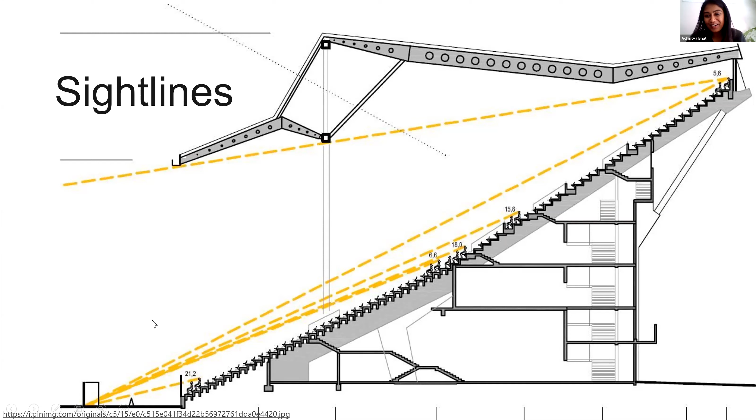And with that, let's jump into the stadium anatomy. So at bare bone level, just the skeleton of the stadium, you have an event level, the lower bowl, a concourse or a walkway, and an upper bowl. And when we are designing a stadium, the most important thing is always the sight lines. So you need to make sure that irrespective of where our spectators are sitting, everyone has unobstructed view of the event level, because most of the time they've paid an exorbitant fee for the tickets.

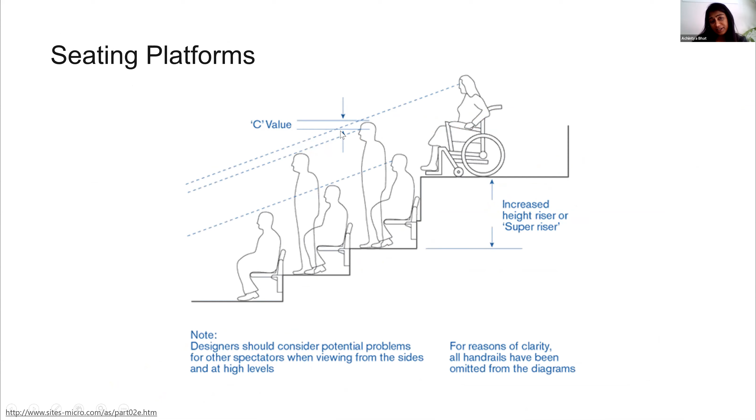And in order to optimize that, the parameter which will help us is a C value, which is basically the gap between the sightline of the spectator with the spectator sitting in front of them. So that's perpendicular distance. And the formula that is used in order to calculate that C value, it's simple, basic math, trigonometry. And this is the formula here, and some of the parameters that are required are the seating, the row depths, and also the step heights here, which are called T and N, and also the vertical and horizontal distance from the focus point, which is at the event level, to the eye of the spectator in each row. So these are the parameters that are required in order to calculate the C value, which will let us know if the spectators have good sight lines.

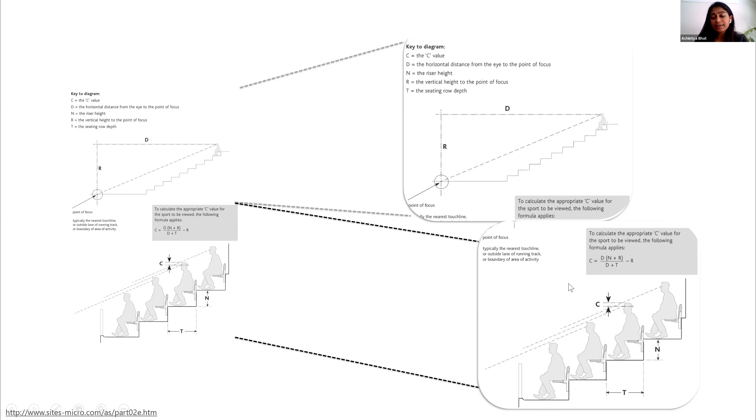So with that brief intro, let's move into the Dynamo scripts, the spaghetti monster. And the way I will go through this is first, I'll dive into the Dynamo script. Then I will show you how I moved it to Refinery if you're using Revit 2020, or if you're in Revit 2021, the generative design add-in.

And I'll also briefly show how you can export the seating plan to Power BI as an interactive map if you want to do additional analysis, maybe cost analysis or something like that. And then finally, how you can push it to Revit.

Some of the parameters which I've assumed here to be constants are my site size, the field size requirements, and also the number of levels I would have in the seating bowl, the walkway depth, the width, and also some of the exit requirements.

So first things first is the number of rows you would have in the seating bowl. For that, our site size is fixed, the radius or the dimension of the field is fixed, and F is the focus, which is the distance from your event focus point. All of those are parameters which are fixed. The variable here is the row depth, which we'll be using for the optimization study.

That's not fixed. And based on that, it will calculate the different number of rows that you can have in the stadium. And then once we have the row depth, we can offset each of these boundary curves and get the row curve location in the horizontal, flat XY plane.

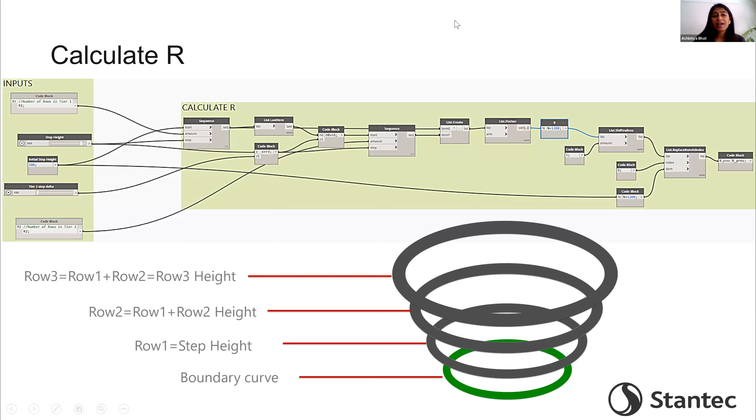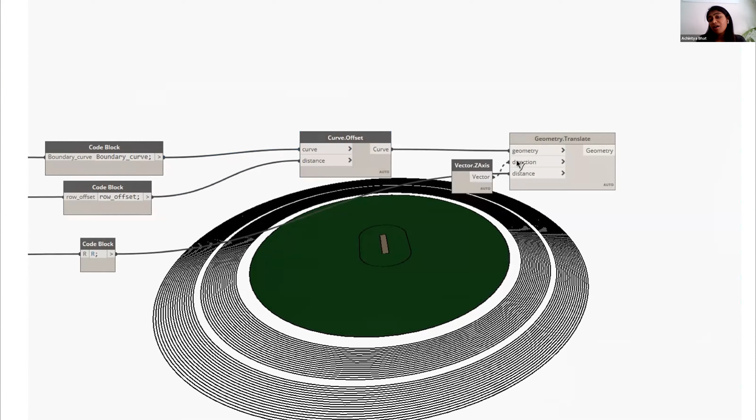So we need to add an additional value, because when a person is sitting, there's a height from the foot to the eye level, which is about 1.2 meters for an average human being. That will add up and give us the R value, the vertical distance. So once we have these two, we know where our row edges would sit in the seating bowl, and where the eye of each spectator in each row would end up, using these curves which show where physically it would be.

And now that we have all of these parameters, we can calculate the C value. But I would like to mention again that the row depths and the riser heights, the N values, are variables. We haven't fixed them. That is what we're trying to optimize here to make sure we get good C values. And I've broken down the C values into 5 ranges. Anything below 60 is not good at all.

Above 150 is very good, but then you would not be fitting as many people as you can. So I think I was looking more for around 120, which is very good. People can still see if someone's standing. And also gave some color coding, just visually when I look at it—if something is red, I know it's below 60.

But all of this just gives us the row edge curves, right? I don't have the actual geometry. So what I did is take a point on each of these row curves and drop them down by the riser heights, then join all of these points to give me the profile of the seating bowl. So now I have the boundary curve, and I also have the profile.

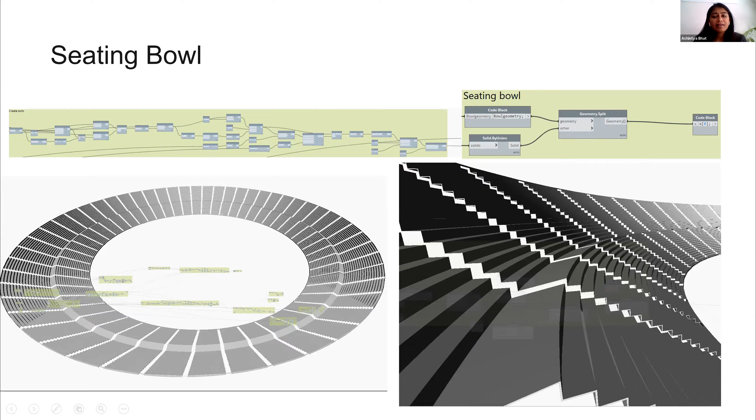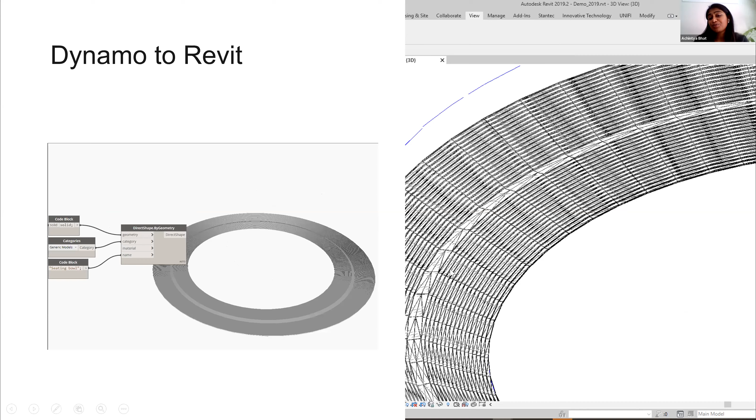Once I have the seating bowl here, what I did was export it to Revit using the direct shape by geometry node in Dynamo. I actually like the Springs node one because, as you can see in the previous one, when you use the out-of-the-box Revit node, it creates triangulation, which I'm not a great fan of. So the Springs node gives a more clear geometry in Revit.

Or you can also break it down. What I did here is export the seating bowl, take all the top vertical and horizontal faces, and export it to get the perimeter curves, then use the floor by outline type and level node in Dynamo to get it as a floor component into Revit. So there are multiple ways you can bring it.

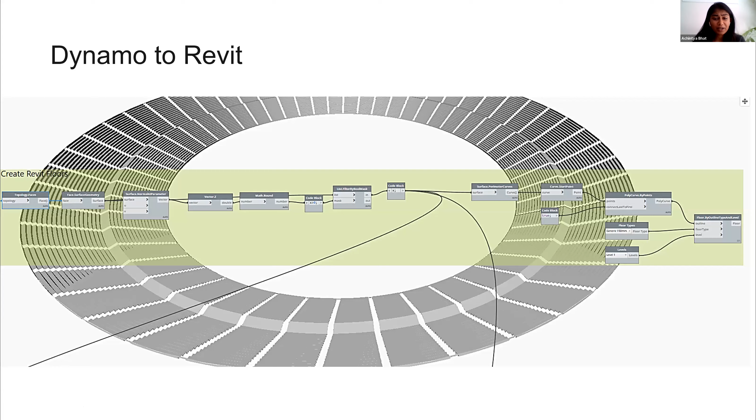So this is an overall picture of how the Dynamo script looks. What I'd like to bring attention to is the data gate node, which I used with Revit 2021—I really like it. What it helps with is: if you set it to close here, it knows not to run the rest of the script after this data gate node, like when Refinery is running.

It will just generate the rest of the script here, which is all I need in order to do my optimization study. I don't have to actually generate my seating bowl geometry and create exit openings and so on—all I need is those seating row curves, which will give me all the values I need to generate my values. So that, I think, is a very good functionality.

Once you have the script, if you're in Revit 2020, you can click on the Refinery option on the top. In this demo, I'm running just a cross product, so it's a brute force algorithm generating all options possible based on the variables I've set. It's not trying to optimize anything, there's no fitness condition given, and it's generating all the possible options.

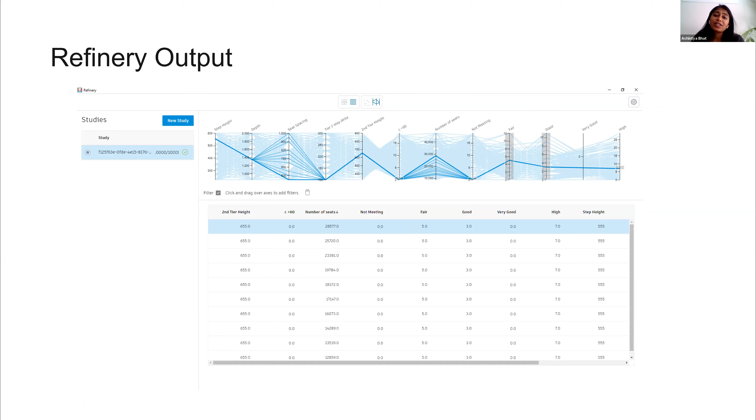After that, it will look something like this, and then it's up to me as a designer or architect. You can select what are your best options. For example, I'm trying to make sure I don't want any seats which have a C value of less than 60, because that's just poor sights for the spectator sitting there. Then you can select the best option, click on it, and use that as your input for your Dynamo script and push it to Revit.

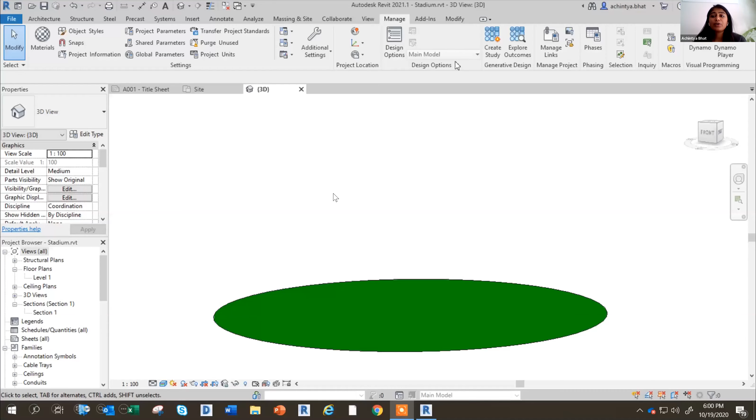With Revit 2021, you can use the export for generative design button on the generative design tab. What that will do is save a version of the script in your C drive. When you go into Revit, you can go to the Create Study tab, select the particular script you want to run, choose your variables, and set your goals.

Here, I'm trying to minimize the seats which have C values less than 60, and maximize the ones which have more than 120. Just for this demo, I'm using a very small population size.

It takes its time, it will start running. I'm going to forward it a little here. As you can see, with every generation that it runs, it's trying to optimize it, choosing different parameters. For example, right now the third generation actually has lesser optimization because it had some which had a C value in the range of 90 to 120, whereas previously it was giving most of them in the range of 120 to 150.

And it will run all of these options for me. I'm just going to forward it. So once it's done, the option is giving me all of my seats in about the 120 to 150 range, which is very good.

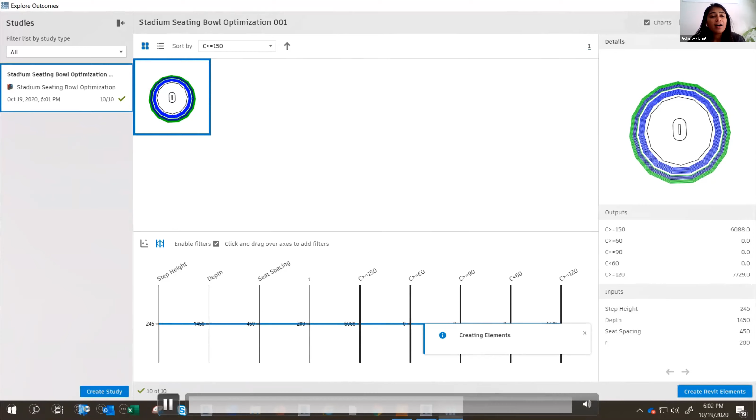Then you can click on the Create Revit Elements button, and it's going to run the part of the script which I had closed using the data gate node. It takes some time to create all of the geometry and then push it to Revit.

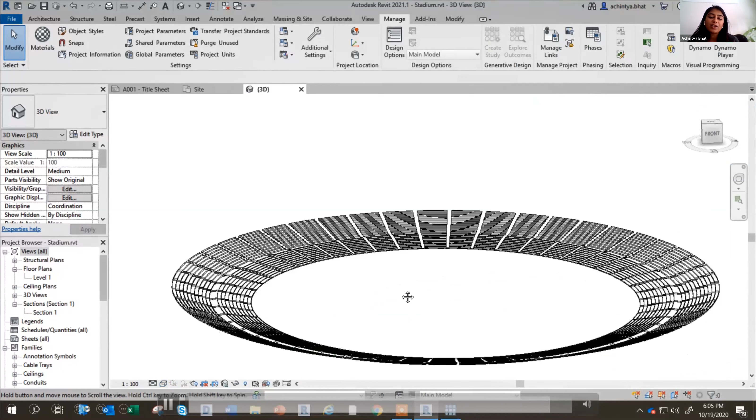So that's how it looks. And if you're not happy, you can run your optimization script again, given more number of generations, increase the population size, or change your parameters.

Also, if you want to do more analysis, like put some costings or do a reporting, you can push the seat plan as an SVG file using the SVG export node. Just explode your geometry, take the top surfaces, get the corner points, and export it to this node. What it will generate is actually a vector file, but when you open it up, this is how it looks - it's a text file. Within Power BI, the BI tool from Microsoft which is free, there is a custom visualization called Synoptic Panel.

You can use that to generate your own custom maps. In addition to the points and vertices, it also has an ID, which is not created by the SVG export node, so you need to do that by yourself - import the SVG file created, add the IDs for each of these polygons, and export it again. That way it's going to look like how the Synoptic Panel visual in Power BI requires it to be.

I wanted to try and define what a digital twin was, and what I realized is that the Digital Twin Consortium themselves don't have a singular definition, because the value of the digital twin changes over the life of the object. So what I'm going to focus on in terms of what the digital twin may or may not be is around the very beginning of the project, in the requirements and opportunity part, and the operations.

I know a lot of the discussion that has been had is around design, construction, and commissioning. I'm purposely going to avoid that, not because it's not important, it's very important, but that's not what our tool does. So when you look at the different forces in healthcare, there's the technology side, in terms of how technology...

in terms of what treats healthcare is changing. Those of you who might have an Apple Watch or a Fitbit know that you're a walking electronic health record. That, on top of what we know about diseases, is changing. A year ago today, I don't think anyone on the call knew what coronavirus was. This whole nature of medicine is really turning things on its head.

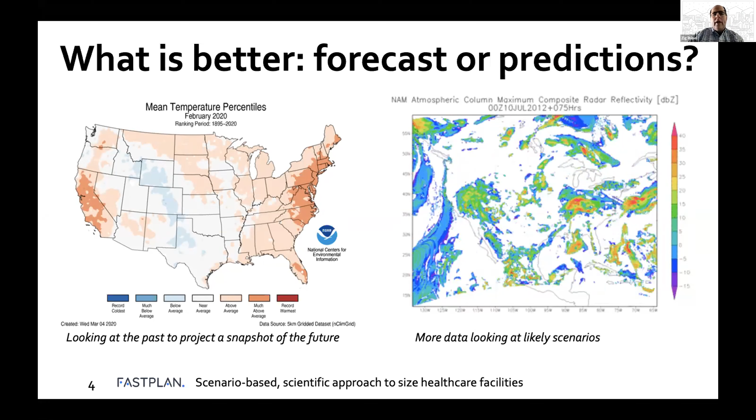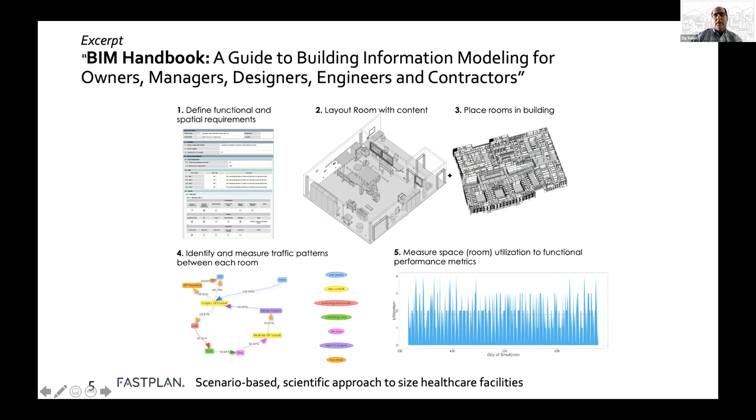This, of course, is the objects and the design of a particular project that we worked on. But the level zero data is all of this - it's the room data sheet, how the rooms interact, and all the utilization of the rooms. Especially in healthcare, maybe not in all buildings, you could come up with an abstracted solution for your design before you actually start the design.

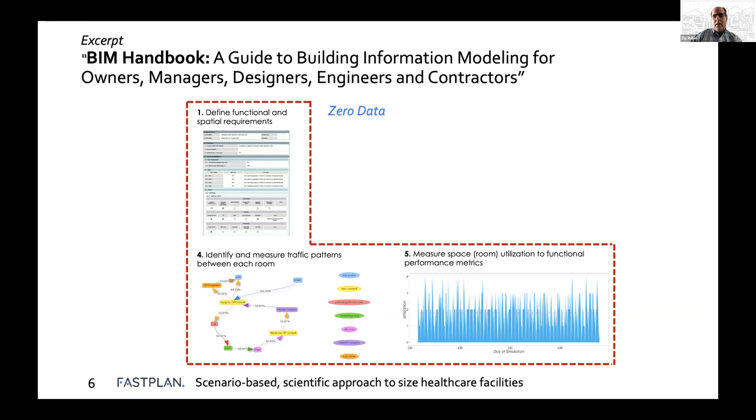What we mean by that - this is just a sample of an exam room. You have the room data sheet and all of the attributes, and those attributes are then linked to the Revit file. We were able to have a bilateral link within Revit and Dynamo to the Excel room data sheet.

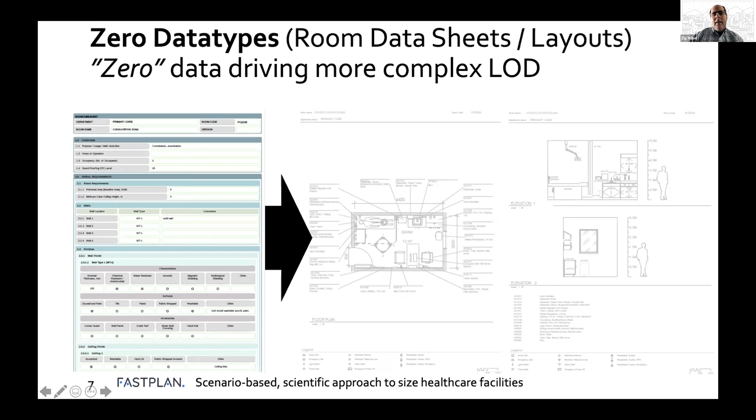More importantly, how the rooms combine and create a hospital experience can be tracked, and then you're looking at all of the room utilization. So one of the important concepts in this approach is that rooms are the atomic element of a building.

Maybe not all buildings, because the stadium doesn't have that many rooms, but certainly for a hospital or even an office building, rooms combine to create floor levels, and then floor levels combine to create buildings. So just like elements combine to create molecules and molecules compounds, if you treat the room as the fundamental object, I think the concept is scalable.

So the way FastPlan works, and we're going to go into the details, is that we tie a clinical diagnosis, like my child has a cold, and that then is tied to a physical space in the building. And then we're able to determine, based on the different types of patients that come to the building, what kind of spaces are needed. And it's a bit of an iterative loop because you're never going to have one type of patient that comes to a healthcare facility.

So I'm going to show a couple of case examples, and then I'm going to show you the actual tool. So this is an example for a new health system in Saudi Arabia where they had no data. It was a brand new city called the King Abdullah Financial District. And the client initially thought of it as a more traditional medical solution, which is, not to get into too many details, but it's 3 beds per 1,000, meaning for every 1,000 population, you require 3 hospital beds.

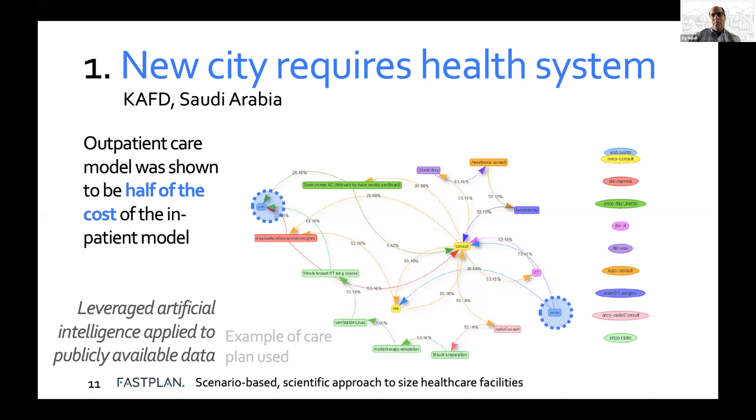Another project that we did that's under construction is for a cancer hospital in Shantou, China, which is about an hour and a half north of Hong Kong. And this is where the client intuitively felt that the doctors were asking for too big of a hospital. And this is where we were able to meet with the doctor, model their hospital, and convince them that some of the spaces that they were asking for, they really didn't need.

So because of that, we were able to reduce the size of the hospital by 38%, along with leaving plenty of space for a future hospital to be added, and increase the research building by 42%, which is what the client really wanted to do. They wanted to invest in research. So it's not always about reducing money, it's really about enabling the client and what they want.

Another project that also is under construction, this is where the client had to make the difficult decision of closing a hospital. And they thought that they would need to double the emergency room size in the hospital that was staying open. And unfortunately, they didn't have enough space in the existing hospital to double the ER size.

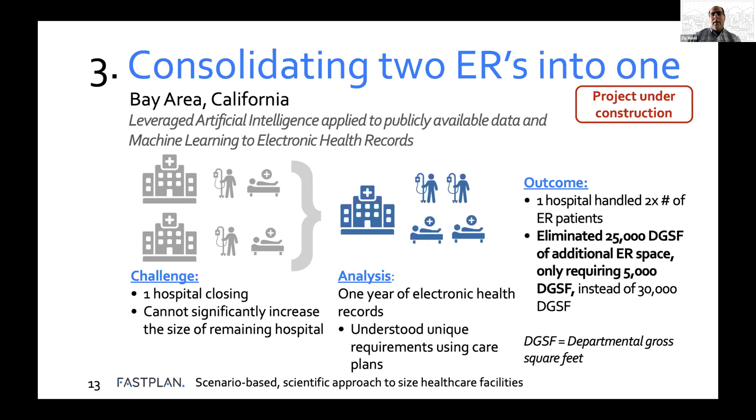And then the last image that I wanted to show you is that it isn't always about saving space or minimizing space. This is a project, again, in China, where the client gave us a space program for an existing hotel that they were converting into a facility for new moms to stay there for a month. For those of you on the call who are a mom in China, it's somewhat common for a new mom to be taken care of for a month after she gives birth. And this is one of those facilities.

And we were able to run a few dozen optimization schemes to show that by changing the room mix, you could actually increase your profitability by 45%. So this is the scheme that is going to be getting built. And again, there was no change in the overall design.

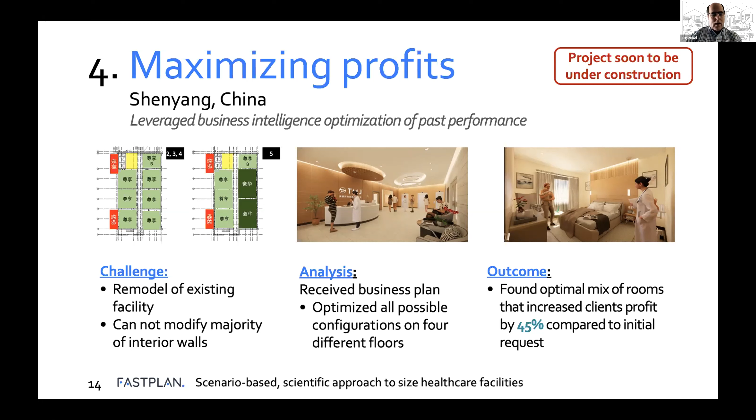So I am going to try and switch to the tool. Okay, just give me a second. All right. Do you see the screen? Yeah, okay, great. So this is our web app.

It's a working prototype, so it's not ready for anyone to swipe a credit card and access. But basically, there's two different grouping of tools. One is the tools itself that I'll go through, and one is the actual scenario. So I will create a scenario. We'll call it Cesar's sandbox. Click on OK, and you should see Cesar's name showing up here.

And the world's population data. I always like to try and pick a different country than the US because we all know what we have here. So since Achintia is from Canada, we'll pick Canada. So we'll just scroll up here, find Canada. And what that's going to show is a population pyramid of Canada. And you'll see there's a slight difference in that there are less younger people than there are older people compared to the US.

And we're able to look 40 years in the future to see how the population is going to age over time. And that is relevant in healthcare because these are the patients that are going to need the healthcare facility more so than the younger, quote unquote, healthier patients.

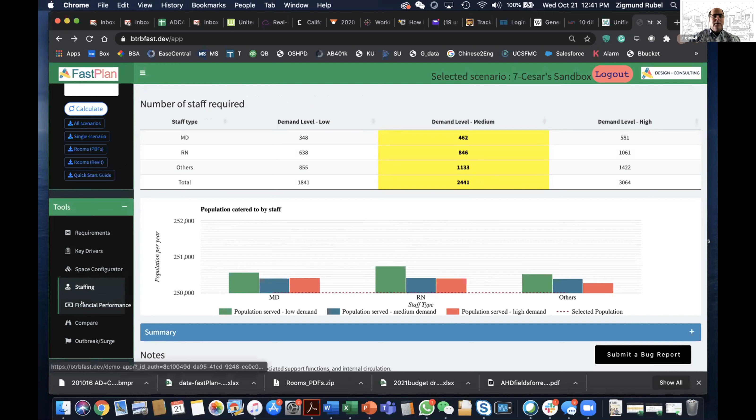And what might be most valuable for your client is that we're able to indicate a financial model. So what the grossing factor is. So the default is 25%. Maybe it's 32%, meaning from departmental gross to building gross. What the cost per square foot is. I have no idea what the cost in Canada is, but let's say it's $800 a square foot. What your equipment cost is, what your staffing cost is, and how many patients are going to show up year one, we'll make that 80%.

And the 2028 is now 2028. So there was no change. So it reinforces that the operational costs are the key drivers for that. Now, in terms of a generative design perspective, what we're able to do is download some of the key data that is created from the program. So we're able to download all of the space program attributes from that.

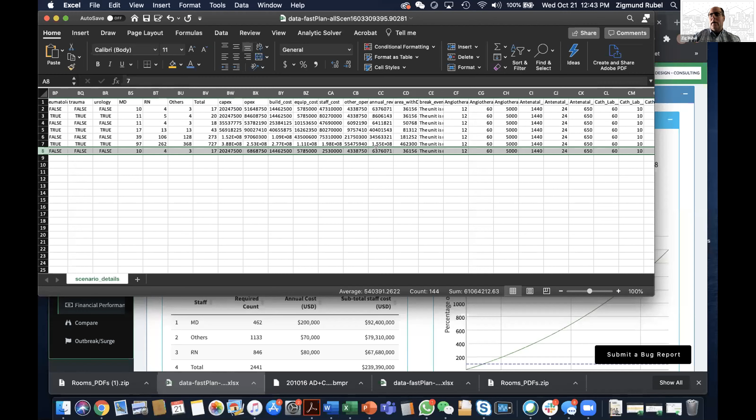And I don't have Revit on this machine, but all of the rooms you can open up in Revit, but this is a PDF of the room. So we have a low fidelity and a high fidelity object for the room that is auto-generated. And it allows the designer to just have a starting point of where to begin with their design so that they can start creating the design instead of doing everything from scratch.

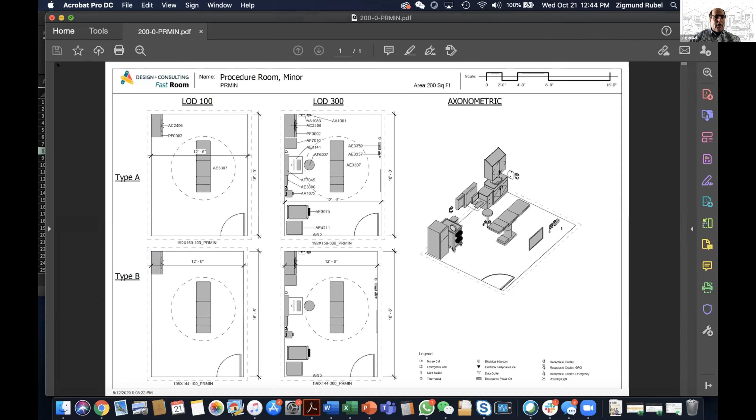And I guess the last thing that I will show in the interest of time is we have a COVID-19 or what we call a surge analysis tool. So you're able to create a model looking into the future and indicating what the transmission rate is, the number of days of recovery, and the probability of severe infection. And what this does is this tells you for your ICU beds, how many patients you could handle without decanting or kicking out your patients, and how many patients you could handle if you are able to decant.

So again, we're not saying that this is reality, but it allows the client to see how their facility might be used in a quick way, as opposed to the traditional way of kind of getting the client's requirements and getting feedback from them after you go back to your office. So that is all that I have. And I'd love to open it up to questions and hopefully also some answers.